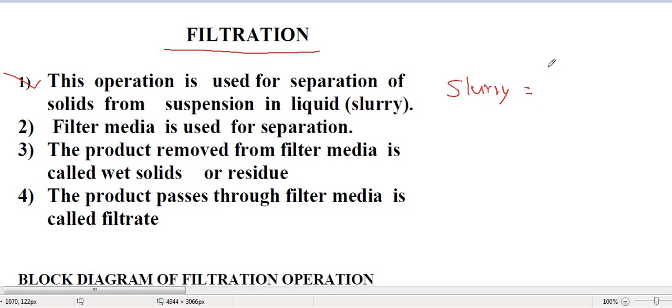So what is filtration? First point, filtration is an operation used for separation of solids from suspension in liquid, that is slurry. So here it is very important that filtration is used for separation of solids from suspension in liquid, that is slurry. So what is slurry? Just try to understand here. Slurry means solids present in liquid.

Just try to get the difference between slurry and solution. While solution means solids dissolved in solvent. In short, sugar solution: sugar is dissolved in the water, then we have the sugar solution. While if you want to take the example of slurry, muddy water.

You know that in the rainy season, there is a small amount of soil particles in this water, we call this muddy water. So that is slurry. That means here solids are not dissolved, but these are present in the liquid, that is called slurry. Okay, we have calcium carbonate slurry. But the important thing is to get the difference between slurry and solution. In slurry, solid particles are present in the liquid in suspension form or may settle at the bottom also. While solution means solid particles dissolve in the solution.

Okay, so first point, filtration. This operation is used for separation of solids from suspension in liquid, that is slurry. Now for this filtration, the main requirement is filter media. This filter media is used for separation. When this slurry is passed through this filter media, only clear liquid passes through the filter media and solid particles are retained on this filter media. So this filter media is used for filtration.

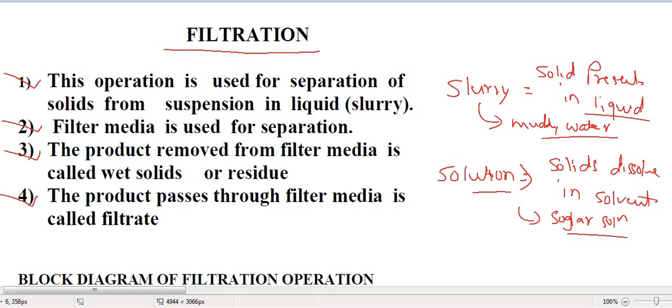Then go for third point. The product removed from filter media is called wet solid or residue. So whatever is retained on this filter media is removed, and that is called wet solid. Point number 4. The product that passes through filter media is called filtrate.

So I will draw you a small diagram and with that you will get this. Suppose this is our filtration funnel. In the chemistry lab you come across this instrument. You put filter paper here and pour any slurry material here. When you pour this slurry material on this filtration funnel, what happens? We have this filter media, so only clear liquid passes through the filter media. Here you get the outlet.

While the solid particles retained on this filter media are called wet solid, or also called residue. While the clear liquid that passes through this filter media, the filter paper, is called filtrate. So here the input is slurry and there are two outputs: wet solid and filtrate. So in this operation, one input and two outputs.

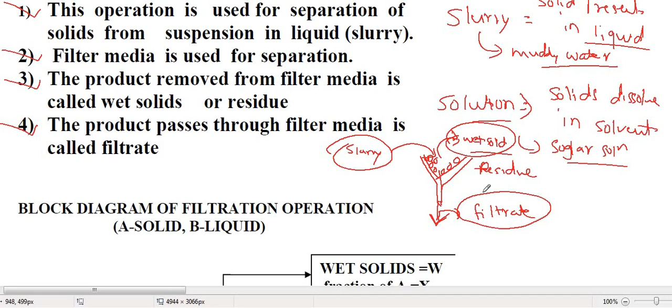Now we'll concentrate on the block diagram of this filtration operation. In this block diagram, A stands for solid material and B stands for liquid. In slurry, we have both components A and B. In wet solid, we have both components A and B. While in filtrate, there will be liquid only.

While there will be liquid in the filtrate. Okay. So here we have this filtration operation. Only one input, that slurry is the input to this particular operation, and there are two outputs. First output is wet solid, second output is filtrate.

Now in this slurry there are two components. Component A stands for solid, B stands for liquid, and the composition of this component in slurry is given by the symbol XAS. XAS means what? Fraction of A in slurry. XBS means what? Fraction of B in slurry. There are two components, A and B.

Coming to the wet solid, it is given by symbol W. Fraction of A in wet solid is given by XAW. Fraction of B in wet solid is given by XBW. Okay. Now coming to this filtrate F. Filtrate is given by symbol F, and here there is only liquid, and therefore you can write down here XBF.

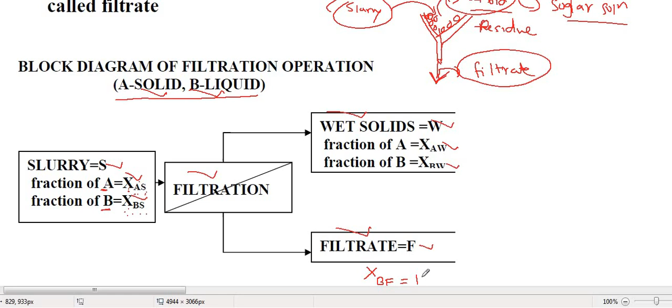That means fraction of liquid in filtrate will be 1. You can consider it is 1 because it is considered 100% pure. Okay. Now based upon this block diagram, we are going to write down the material balance equations concerned to this filtration operation. I will write down these equations and I will explain them.

So the first equation is called the total material balance equation. As you see in this block diagram, there is only one input, and that input is slurry. So that slurry must equal wet solids plus filtrate at steady state. Whatever input must equal output. Here there is input slurry, and there are two outputs, wet solid plus filtrate.

So we get this first equation, S is equal to W plus F. This is our first equation. This equation is nothing but the total material balance equation. Now come to the second point here. Second equation, material balance of component A.

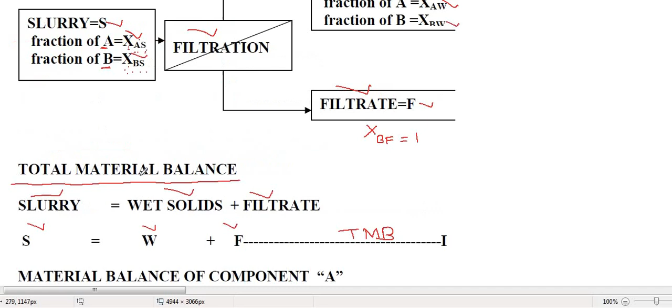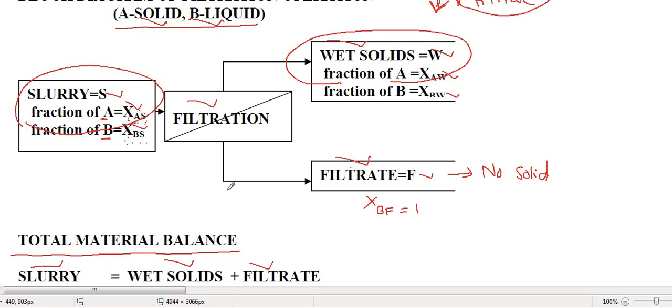Okay. So as you see in this block diagram, the solids are present in the slurry and in the wet solid, while in the filtrate there are no solids. That means 100% liquid we have considered. And therefore when you write down the equation for material balance of component A, solids in slurry, A in slurry, equals A in wet solids, because in filtrate there is 0% solids.

And therefore we get this equation: A in slurry, that is solids in slurry, is equal to solids in wet solids. And how are solids in slurry given? Solids in slurry are given by amount of slurry times fraction of solids in slurry, XAS. Here A stands for solid. That is equal to solids in wet solid.

So solids in wet solid is given by this particular equation, where W is the amount of wet solid and XAW means fraction of solids in wet solids, or fraction of A in wet solids. So these two equations are the material balance equations of filtration, and with their help you can find out unknown quantities.

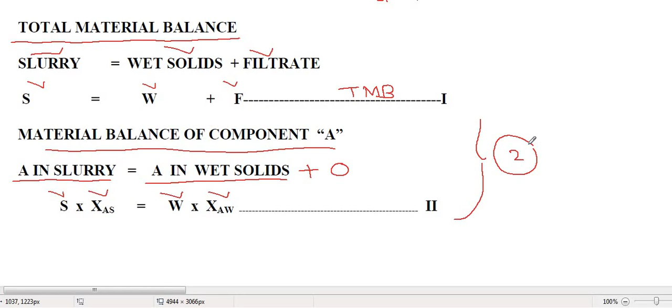Okay, now we'll see how to use this equation to calculate an unknown parameter in this particular filtration.